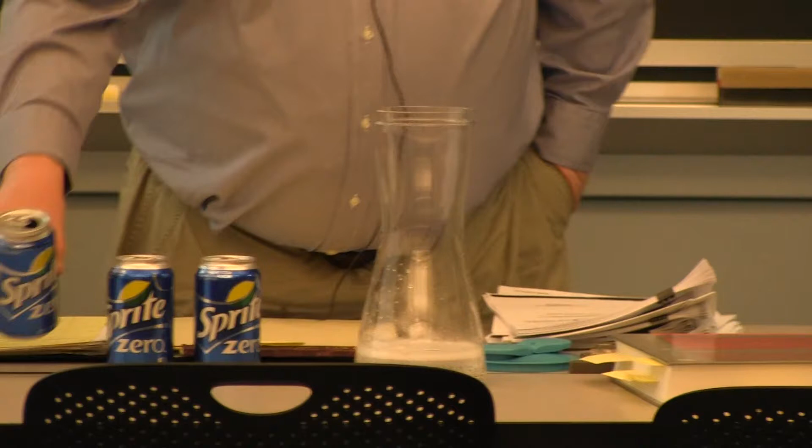Okay, so to start today, I want to take some Sprite Zero. Basically, I could have used club soda, but I wanted something where if I pour it in here, you'll see the CO2 evolve. Okay, suds, foam—they're not really suds, they're foam. I want you to watch how quickly that dissipates, the gas dissipates.

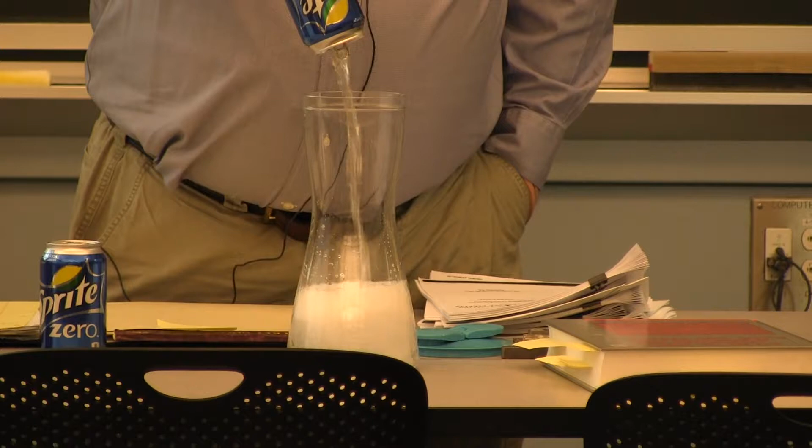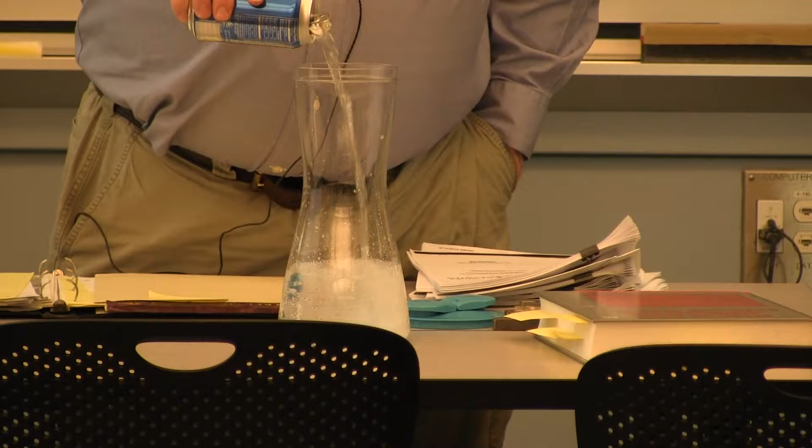We're going to talk about it towards the end of class. This all relates to, by the way, this is sugar-free. I don't want to spill it all over the table and get everything sticky for the next class.

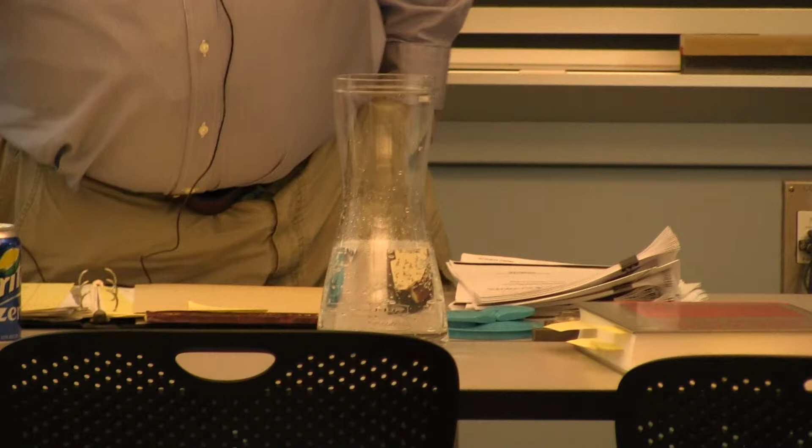This relates to the Achilles heel of steel. I don't know if I ever told you the Achilles heel of steel, those of you who took the class last term—anybody know what it is? It's called hydrogen, okay? And what you just saw, CO2 coming out of a soda, is time-wise an almost perfect analogy for how fast hydrogen comes out of steel as it solidifies over the next 48 hours.

This will be flat and have no zing to its taste in 48 hours. You saw how fast the CO2 came out and bubbled away, and that's about how fast, once the steel starts to solidify, it's rejecting the hydrogen. And it continues—you see some bubbles coming up here, and you'll see them at the end of class, but there'll be fewer.

We'll talk about hydrogen, but in processing of steel, there are specifications that say if you introduce hydrogen from welding or electroplating or any other process, you have to put it in a furnace and bake the hydrogen out within 1 to 4 hours, because if you don't, you could form cracks. The hydrogen can form cracks in the steel under certain conditions. We're going to talk about that more than you ever wanted to know, at the end of today and tomorrow.

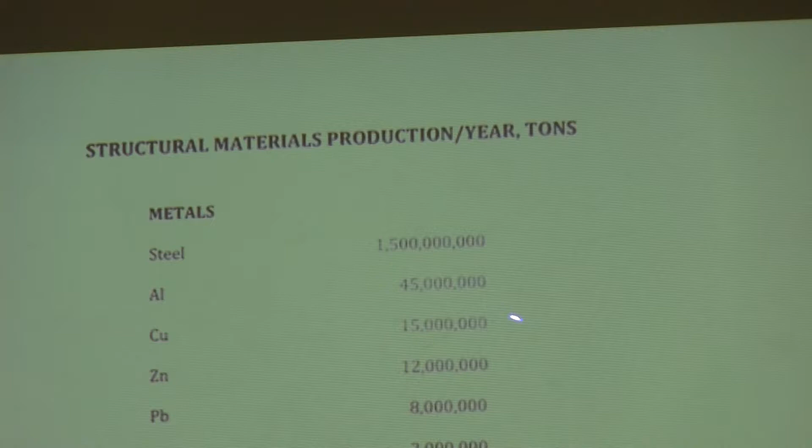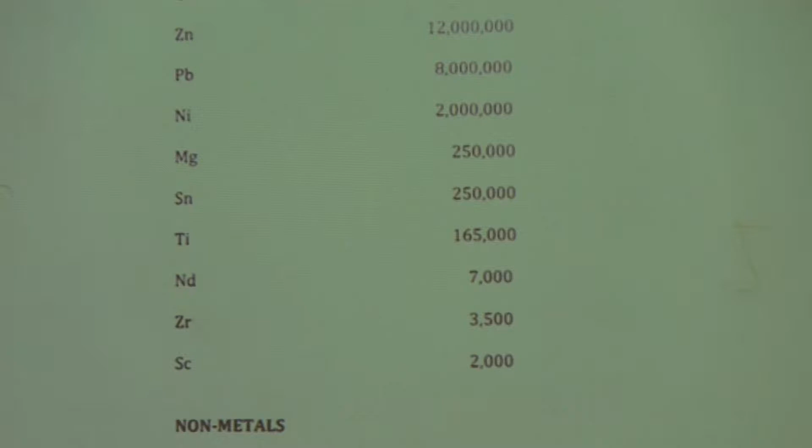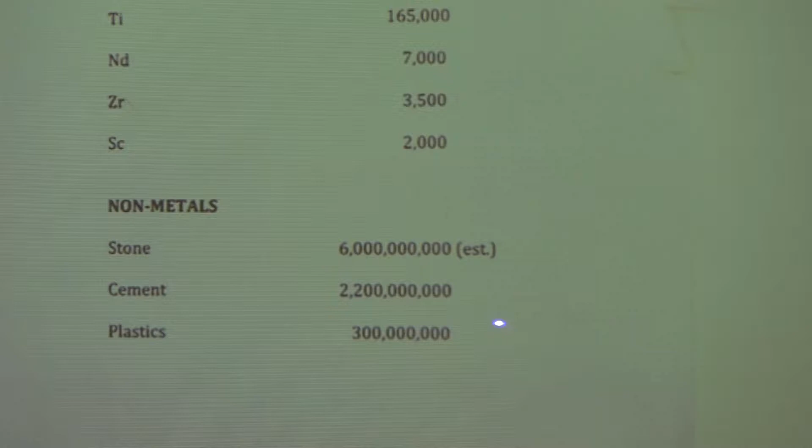If I look at tons produced per year, steel is 1.5 billion tons. The next most common metal is 45 million tons. Stone is the most at an estimated 6 billion tons in the world. Cement as a structural material is about 2.2 billion tons - these two are obviously more than steel. Plastics, all combined, are only 300 million tons, so the plastics industry on a weight basis is 20% of the steel industry.

So yes, we will talk a fair amount about steel because it's an important material. Among structural materials, it's the predominant one. Now you can say, well, what about aluminum in automobiles?

Well, they've been making all-aluminum Audis for 20 years. They made an all-aluminum Duesenberg in the 1930s, or a Pierce Arrow - there's a picture I have of J.P. Morgan standing next to his all-aluminum Pierce Arrow. But those were not consumer cars like a Model T. The Ford Taurus is still made out of steel.

Yeah, you can buy a $90,000 Audi, it's all made out of aluminum. And you're going to soon be able to buy a Ford F-150 - not all aluminum, not the frame rails, they're still steel, but the body is going to be aluminum. They haven't announced the price yet; this summer they'll announce it.

Anybody want to bet what the increase in price is going to be? The base F-150 right now is about a $30,000 truck - you can add bells and whistles to get it up to $55,000, but it's a $30,000 vehicle. Anybody want to guess what the all-aluminum F-150 will cost? I'll bet it's in the $40,000 base price range - it'll add a third to the price. That's my prediction. But it's going to blow away all the other pickup trucks on gas mileage.

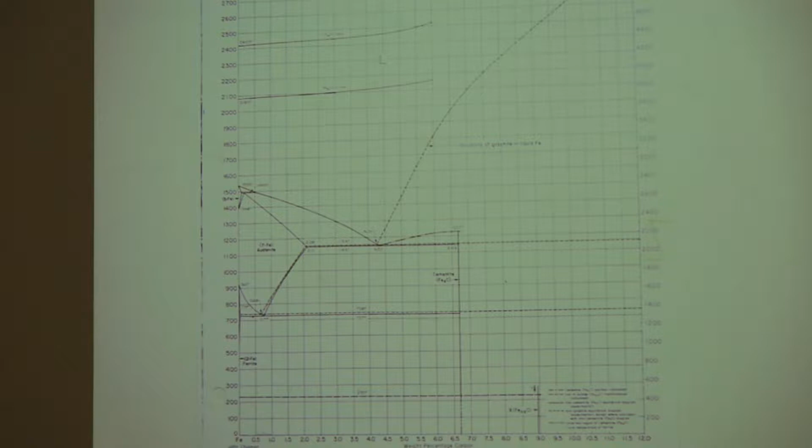Those who've been to our departmental conference room know it's called the John Chipman Room. John Chipman came to MIT in the late 1930s. He was a physical chemist from Georgia Tech, and he taught people how to make steel with consistent composition. He had a tremendous impact on this industry.

This phase diagram was evaluated. He retired in '62. This phase diagram he published in '72, when he was 75 years old. So John and I remember going as young assistant professors to meet with John Chipman and ask him some questions when he was in his 80s. He was still working on things.

But the interesting thing about steel: this is the liquid region at high temperatures, above 1530 degrees C. The steels are at less than 1 or 2% carbon, and they have this region called austenite. The cast irons are also on this diagram—they're above about 2.5% carbon. So the cast irons are here, the steels are over here.

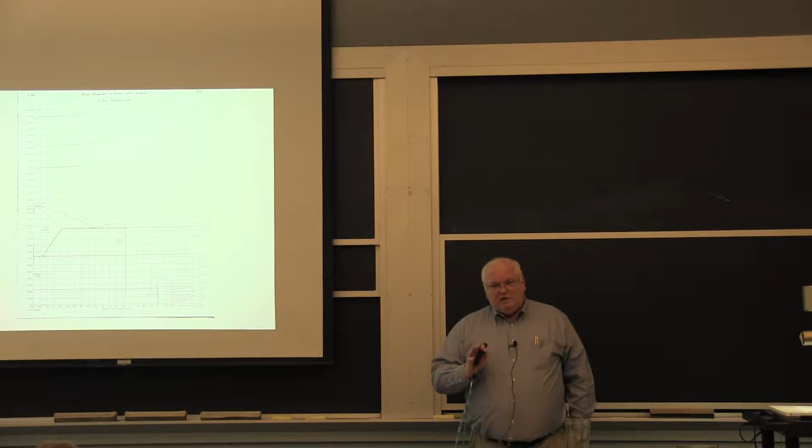The interesting thing about steels, and one of the things that gives them a lot of their weldability, is they transform from body-centered cubic to face-centered cubic at a temperature somewhere between 723 and 910 degrees centigrade, depending on the carbon content. And because of that solid-state transformation, the steels can give you very fine grain size.

Very fine grain size in most metals gives you very good strength. So it turns out I can weld two pieces of steel together and just let them solidify without doing anything special, and I'll get 100% joint efficiency. That's not true in many of your other materials. It is true in steel, and it's true in titanium.

Titanium has a phase transformation like this. A system that gives you a crystal structure phase transformation leading to a natural refinement of grain size will give you very good joint efficiency. You go to aluminum, and you're going to see we have some problems getting 100% joint efficiency.

What's 100% joint efficiency? You weld the bar together, and you pull on it, and you get the same strength as the base metal. We're going to talk about whether you want the same strength, or what happens if you use undermatching filler metal.

So it would always fail in the weld metal. Or do you want overmatching? And how much overmatching? Well, it turns out the answer is you do want overmatching for good mechanical behavior reasons, but we'll get to that as we go along.

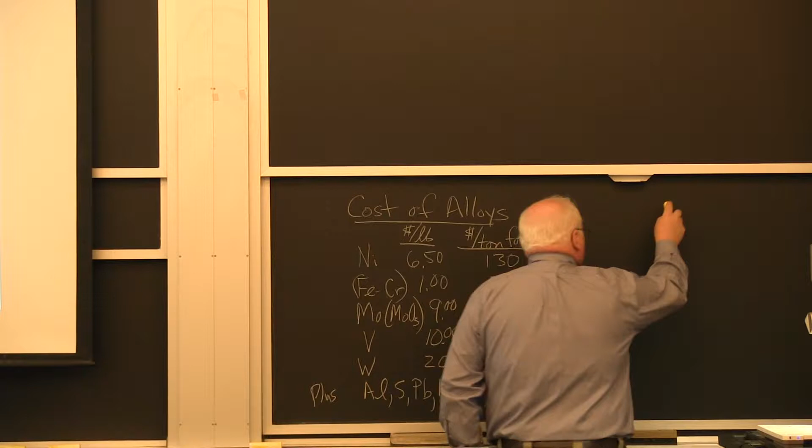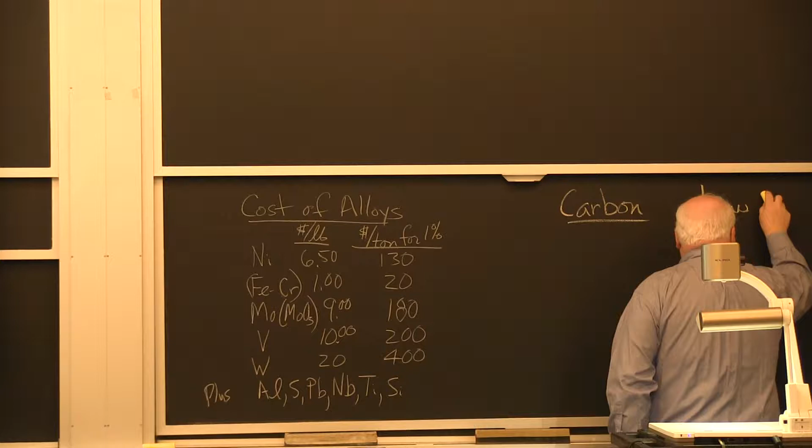But this is the iron-carbon phase diagram. All steels are based on this. In fact, the steel industry, starting probably 100 years ago or more, divided steels into carbon steels and low alloy steels. Or actually, they called them alloy steels, but we really call them low alloy now. They also have high alloy.

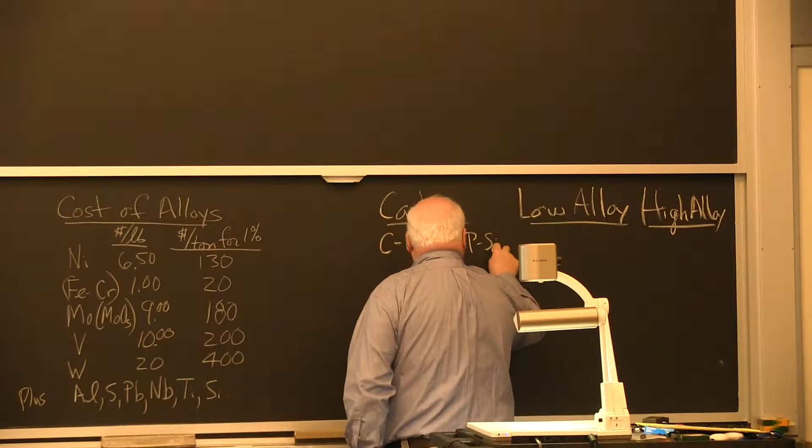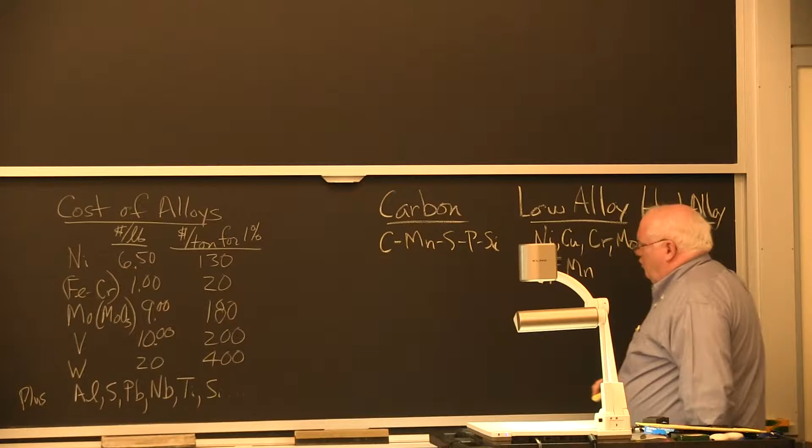Carbon steels contain only carbon, manganese, sulfur, phosphorus, and usually silicon. If they have any of these other things—like nickel, copper, chromium, or molybdenum—or high manganese, which I think is above 1.25% or so, they're called low alloy steels.

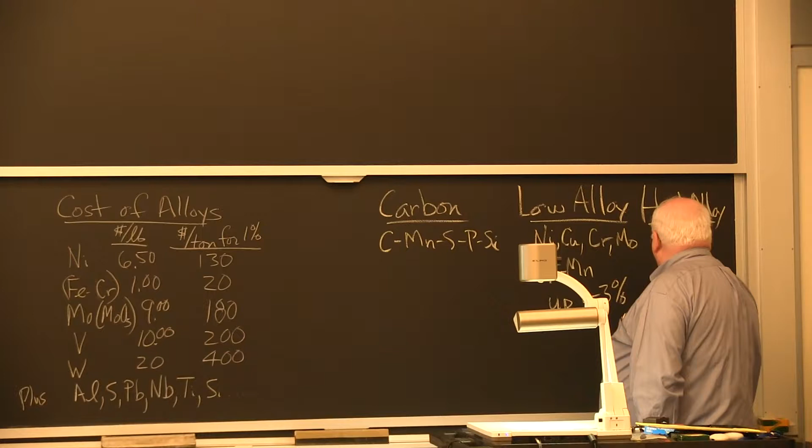The alloy content might be, let's say, up to 2 to 3%. High alloy steels are greater than 4% typically. And if you get high enough alloy, you can get steels that we don't even call steels anymore—when they're less than 50% iron, we start calling them nickel-based alloys or cobalt-based alloys.

There's an entire system, and when Mike Balmforth talks about stainless steels, he'll show you a genealogy of steels similar to what I showed the class last semester.

But in any case, carbon steels historically were dirt cheap. They were priced differently than low alloy steels because it was much more difficult and expensive to make low alloy steels, due to the alloy content. How much cost was there? Well, if I add nickel to steel at a 1% level, I'm adding $130 a ton.

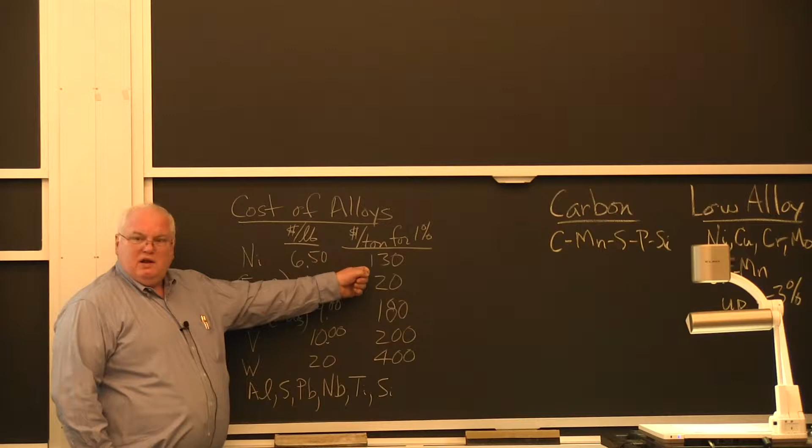What's the typical price right now if I went out to buy some carbon steel plate or bar or something? Anybody know what it costs per ton for a ton of steel? Approximately.

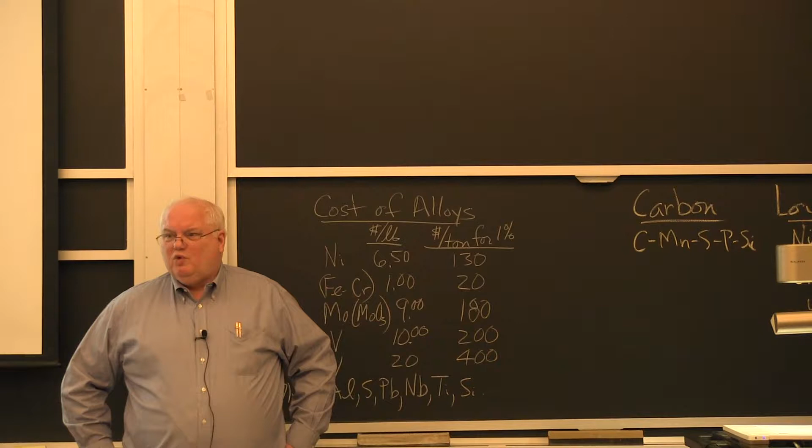That's if you're buying in low quantities, but if I'm General Motors, I'm going to be paying $400 a ton, which is only about 20 cents a pound. So carbon steels right now, the cheapest bar stock is probably $400 a ton.

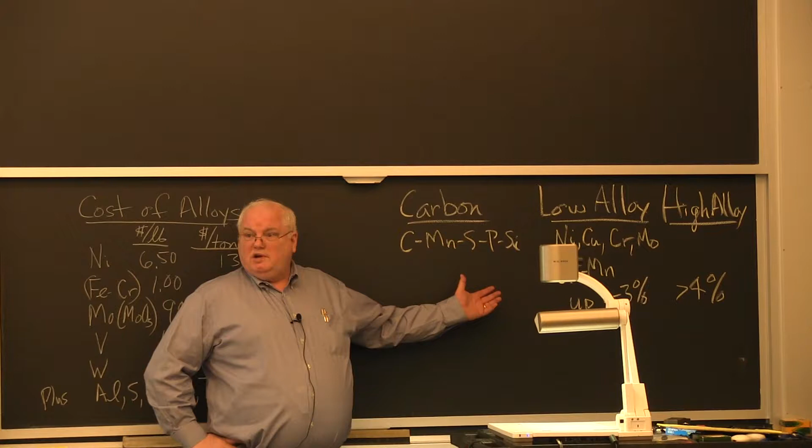Reasonably good quality automotive sheet might be $1,000 a ton, so that's 50 cents a pound. But this is if I'm going to go out and buy 100,000 tons, like General Electric Appliance Park, where they make washing machines and refrigerators, or General Motors. They're going to negotiate prices of $400 to $1,000 a ton. If you're talking low alloy steels, the prices can be anywhere from $800 a ton all the way up to $10,000 a ton or more.

And if I'm talking high alloys, now you're in your $4 a pound range per ton, $16,000, or $8,000 is $4 a pound. But if you get to the nickel-based alloys, the high nickel alloys, you could be paying $30,000 or $40,000 a ton. So we build nuclear reactors out of these things, out of great big thick plate, but it's not cheap.

Nuclear reactors cost - right now, what's the cost of building a nuclear reactor? Well, you can't do it because the environmentalists will take you to court for 10 years. But if you could build a nuclear reactor, what would one cost? You're a nuclear physicist - 4 billion. Yeah, 10 billion is a good number. 4 billion, I'm not sure. You're going to have a very friendly country, okay? To build, you could build one for 4 billion.

Yeah, and it takes about 10 to 15 years to get certification, which is one of the reasons the cost keeps jumping. But it turns out they use high alloys, the best alloys. But again, this gets into a matter of cost. If you're going to make an automobile, you're going to make it out of carbon steel if you can, or you're going to use a very low alloy steel, so far as that goes.

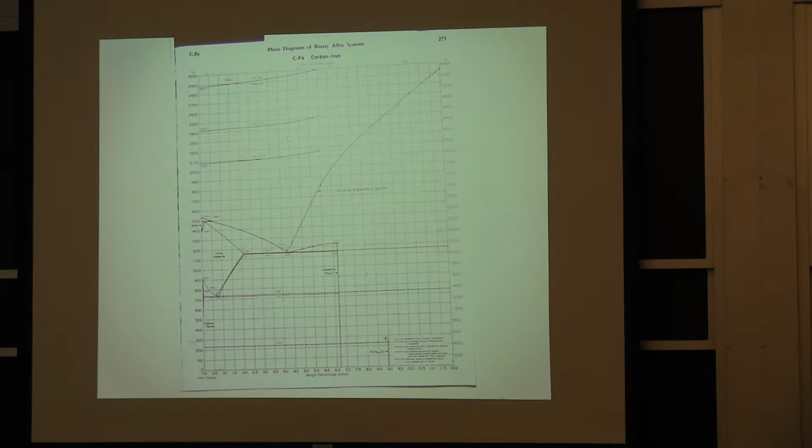That's because the steel can transform at high temperatures to this face-centered cubic austenite phase, and if you quench it, you can get a metastable phase, which is not this body-centered cubic ferrite, but you can get something called martensite. And martensite's as hard as a file, a steel file, so far as that goes. So you like to have something that can be hardened.

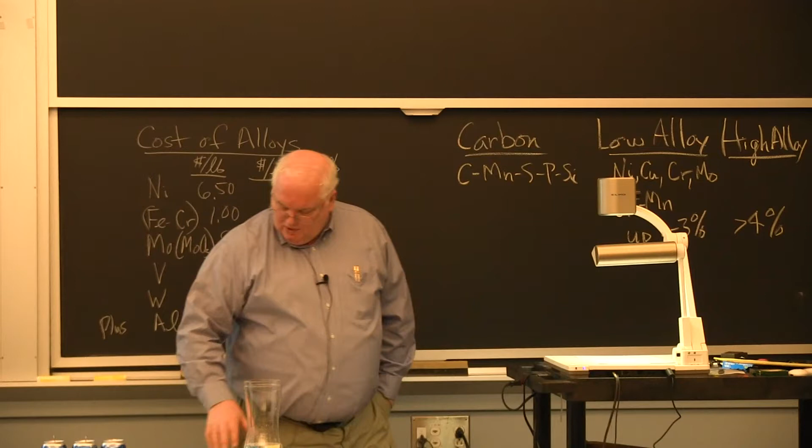There are other alloy systems that can be hardened. Aluminum is precipitation hardened - you heat it up and you cool it down, or you quench it. You heat it up, solutionize everything, quench it, and then you bring it up to an intermediate temperature. We call it aging, and you get little precipitates. And some people will tell you that's nanotechnology. Well, the Wright brothers used nanotechnology in their engine at Kitty Hawk. It was an aluminum copper alloy that had been precipitation hardened.

Aluminum for lightweight, because it's an aircraft. Precipitation hardening, so it had decent wear resistance. And it's still sitting in the Smithsonian today.

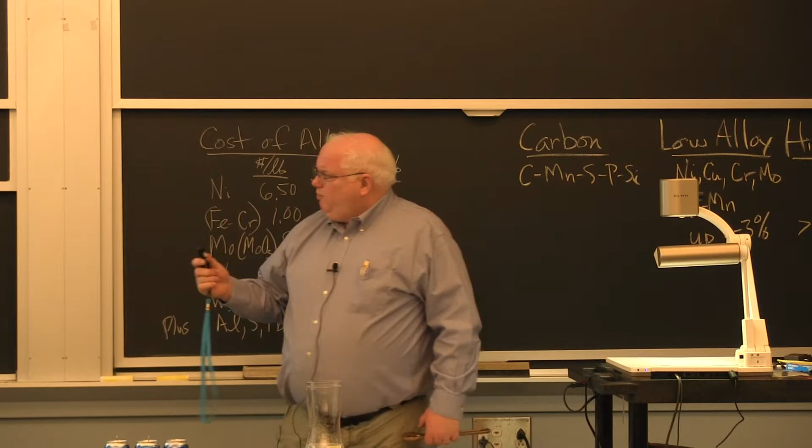Cast iron is more than 2 or 2.5% carbon, more than carbon steel, because cast iron is a eutectic. If I look at the melting point here, cast iron, you'd like to have something that is low melting to make it easy to cast.

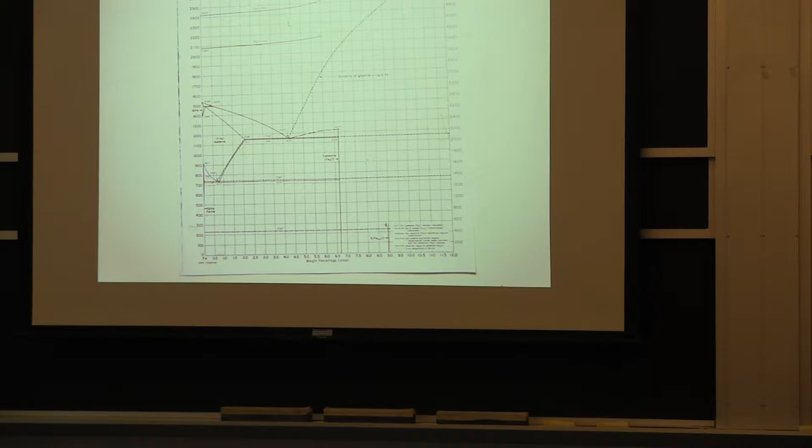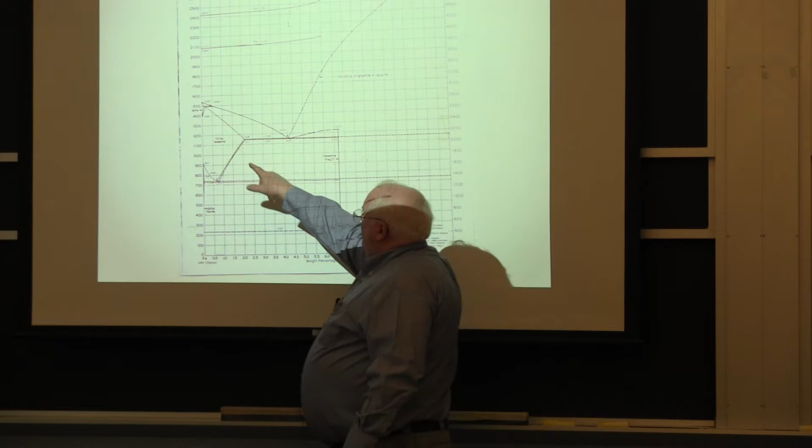Historically they call it cast iron because if you took iron ore, where you didn't necessarily want carbon, you would mix iron ore with coal, or originally, at Saugus Iron Works, they mixed it with charcoal, which is carbon, just a wood source of carbon. And when you try to melt it, the carbon will alloy with the iron and form cast iron.

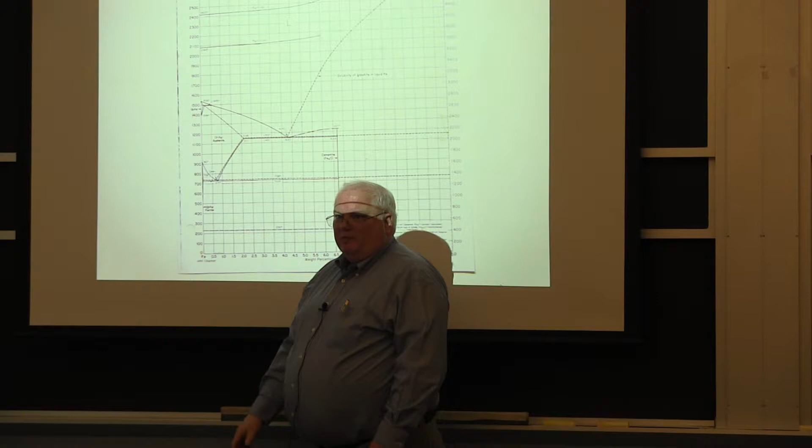In the 1600s, they didn't have the phase diagram, but it was cast iron that melted at a low temperature. They could take that cast iron and beat it, forge it, heat it up. That's the blacksmith, folding it over, making swords and stuff. As he did that, the carbon would burn off the surface. If he did it enough, he'd get something more malleable, more ductile, that was wrought iron rather than cast iron, because he had wrought it on the forge. And if he did it long enough and didn't oxidize it all the way to nothing, he would end up with steel.

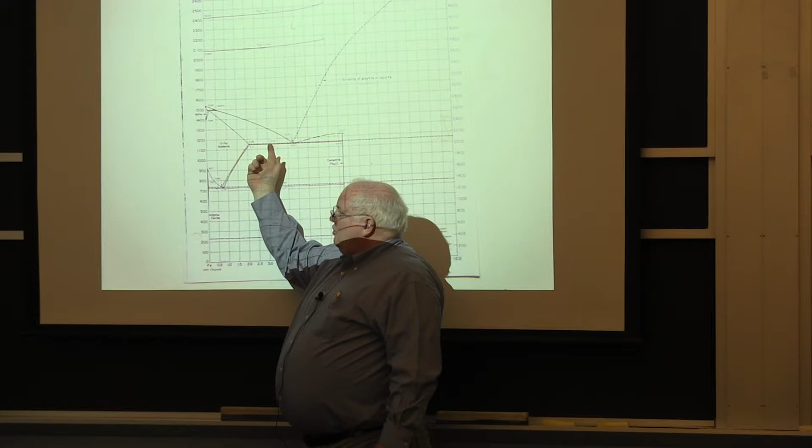So historically, they would take iron ore, reduce it with carbon, and end up with cast iron. Then they would sort of work their way back across the diagram, and if they're lucky, they could end up with little bits of steel, which were tremendously expensive. All that work that went into things.

I've estimated the person hours per ton in the 1600s was about 2,000, maybe 3,000 person hours per ton of cast iron or wrought iron. Well today it's about 20 minutes a ton. Look at that productivity gain.

And what was the big productivity gain? It was 1856. Sir Henry Bessemer taught us how to build a vessel so we could burn the carbon out of the cast iron more efficiently without oxidizing all the iron back to the ore. That was the beginning of the Steel Age in 1856.

And who was the Bill Gates of his day, the richest man in the world? Carnegie, Andrew Carnegie. In his day, he was richer than Bill Gates or Warren Buffett, on a proportional scale. And it was all because of the railroads and steel.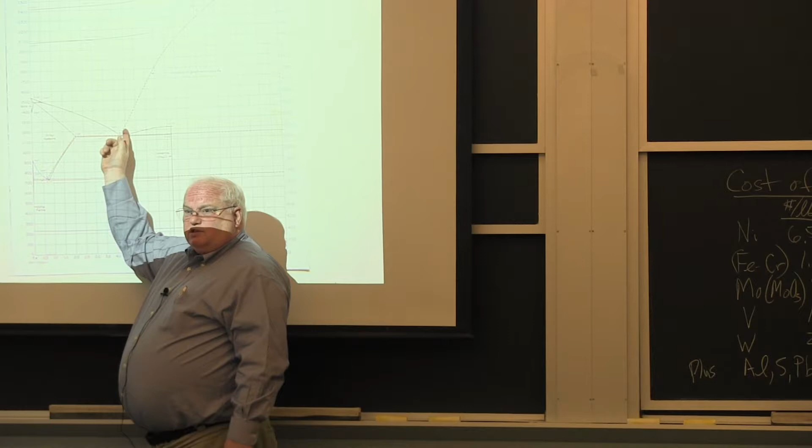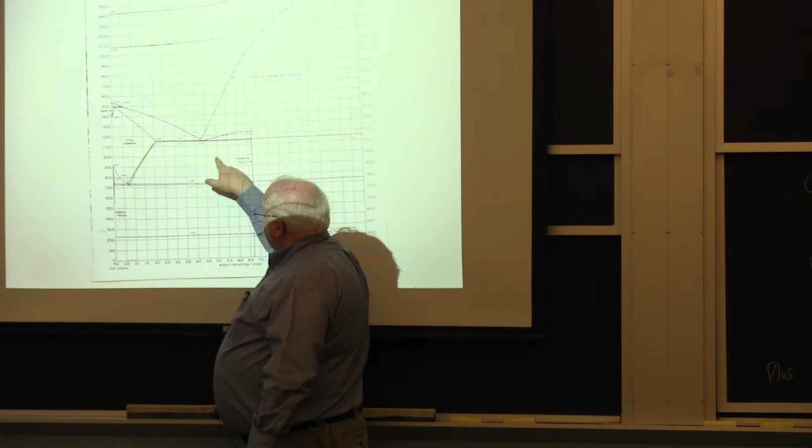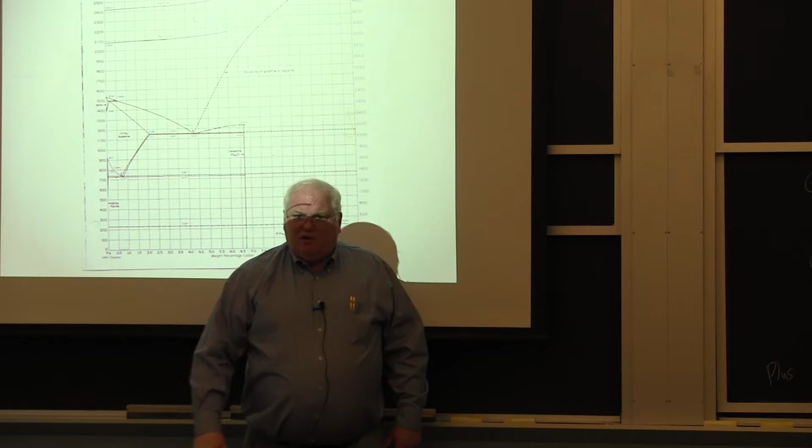So there are certain things that came along, but the reason it's called cast iron is because that's how it was made originally. You take charcoal and iron ore, reduce it, and you end up with cast iron, which is right here on the diagram. All the cast irons are somewhere around 4.3 percent or so, but you can have cast irons down here or up here. You don't go above 5 or 6% carbon in cast iron because you run into other problems.

To tell you how it happened: in the United States we had some iron ores that were very low in phosphorus, so we could make good steel. In Czechoslovakia, a lot of the Europeans, the Czechoslovakians, were some of the best steel makers in Europe. And the Czechoslovakian iron ore had a lot of phosphorus and a lot of sulfur, and they tried to make their steel but could not get consistent results.

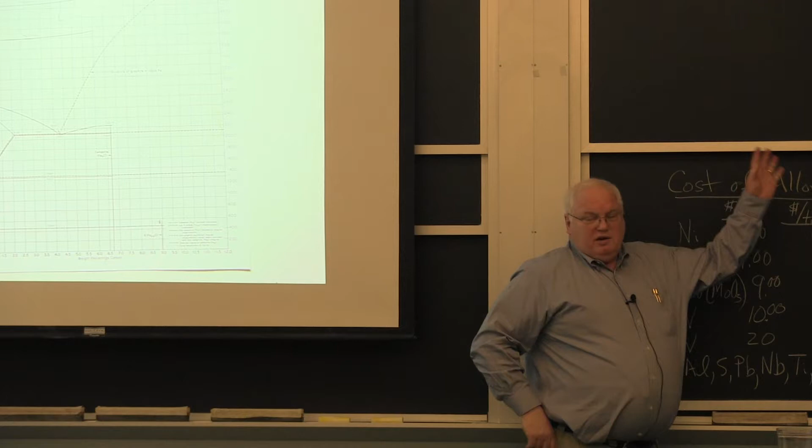It wasn't until John Chipman came along in the 1940s that really taught people how to get consistent results. But you don't just take iron and carbon and put them together. You put them together with a flux, and that flux might be limestone. It could be calcium silicate, which geologists call wollastonite, just a rock. They might throw sand in there. So they throw these different things into the cast iron, which you're then going to turn and burn the carbon off to make steel.

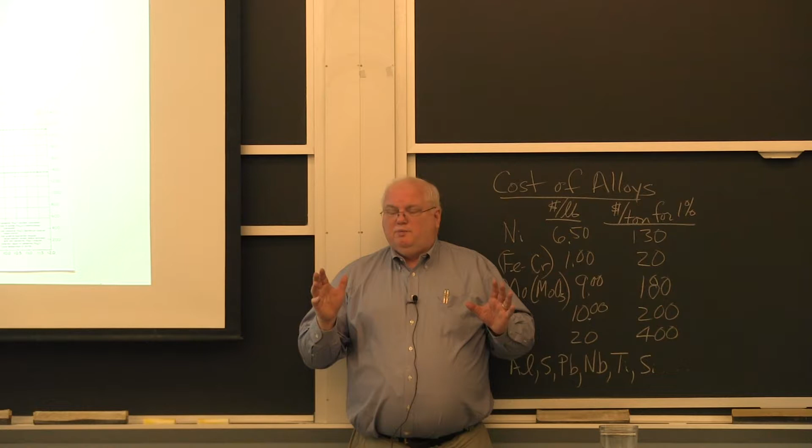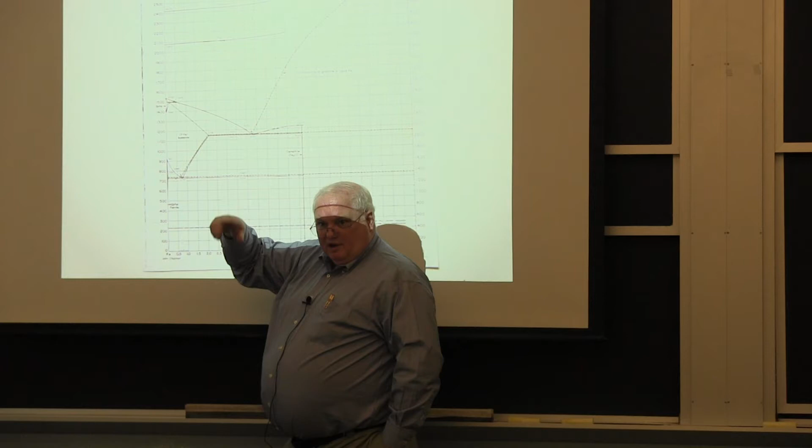But if you have very much silicon or very much sulfur, you've got a real problem, because the iron-sulfur diagram has a really deep eutectic with the sulfur. Remember, sulfur is right underneath oxygen on the periodic table. Here's your eutectic with carbon, but the eutectic with sulfur is an even deeper eutectic, below the hot working temperature where you're going to forge that steel.

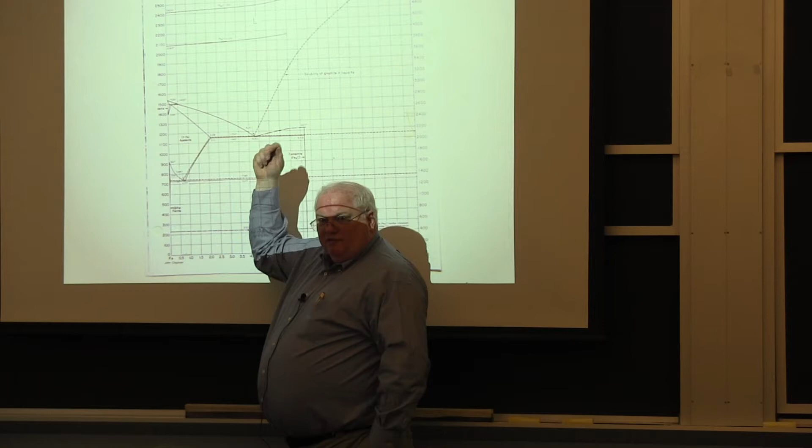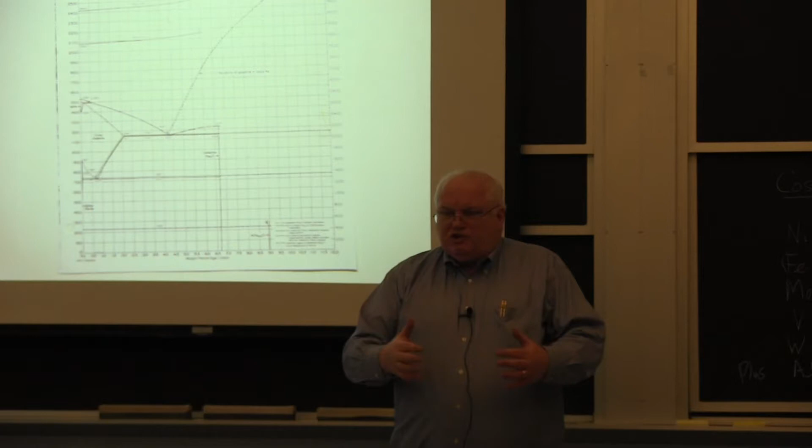So you'd form liquid iron sulfides on the grain boundaries, and they call it hot shortness or hot tearing. When you try to roll or forge the steel, it just crumples into pieces because of the liquid iron sulfide. Someone learned if you throw some manganese in, it will form stable manganese sulfides that melt above the melting point of steel. So manganese is merely a way to tie up the sulfur impurity that comes from your coal.

Then they had problems with phosphorus, and they had to learn to use what they call basic refractories, like calcium-containing refractories. There's acidic, which is - and I hate these terms, but people were chemists back then, and they knew acids and bases. The silica-based slags were considered acid, and the basic slags were based on calcium or magnesium, like calcium hydroxide, magnesium hydroxide. Silica would tend to form acidic mixtures with things.

They make no sense to me today, but they made sense to the people who were basically working with chemists who were working with water-based systems back then when they thought about these things.

I went back to a 50-year-old book on welding metallurgy, written in the mid-60s, and he didn't even list the basic oxygen process, which is how all steel is made today, because it didn't come into being until like the 1970s. But even back then, if you read specifications, it said it can be made by the acid process or the basic process. That's just a question of - you've got iron and carbon, and what is your other constituent? Your slag is going to be made out of wollastonite or sand, or it's actually made out of a bunch of these things. But what's the composition of it?

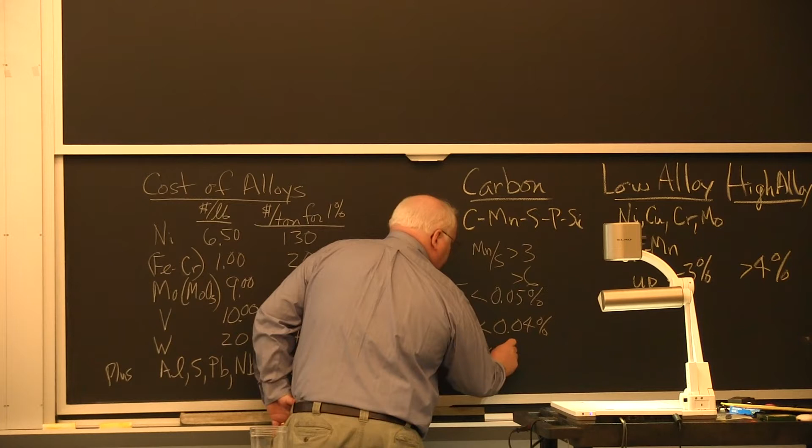If I go look at an ASTM spec that was originally written in the 1920s or 1930s, it will say the sulfur must be less than 0.05%. So that's, let's say, 1920s. By the 1940s, they were saying sulfur must be less than 0.04%. By 1975, when Tom Eagar was working for a steel company, sulfur was typically less than 0.01%, and the Japanese were making it at 0.005%.

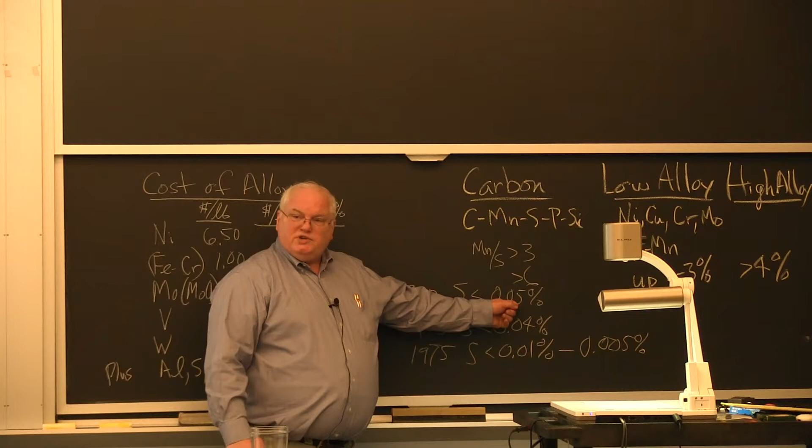They had modern equipment, and they were beating our socks off in quality of steel. So you want to have the sulfur very low in almost every case. 0.05%, 500 parts per million, was about the best they could do in the 1920s with any regularity.

They didn't know how to control it until John Chipman told them what types of slags and stuff to use. By the 1940s, you'll see 0.04. I can go to an ASTM spec and I can look at it, and they'll still have today, say the sulfur has to be less than 0.05. Are you kidding me? No one makes a 0.05 steel anymore. They haven't made it since before 1950.

They got to this, and then they were getting to very low sulfur. Sulfur does a lot of bad things for toughness and other things in the steel, but we've learned how to make it better and better. We can regularly get down to 0.002 or 0.001 sulfur today if we want, but we don't usually need to.

I just think it'd be nice to talk a little bit more about the slag, because you mentioned it a few times, and I know it's an ionic phase. Right, lower densities, it's on top, it's at very high temperatures, so you're close to equilibrium, but I'm not sure everyone here follows that. Yeah, okay.

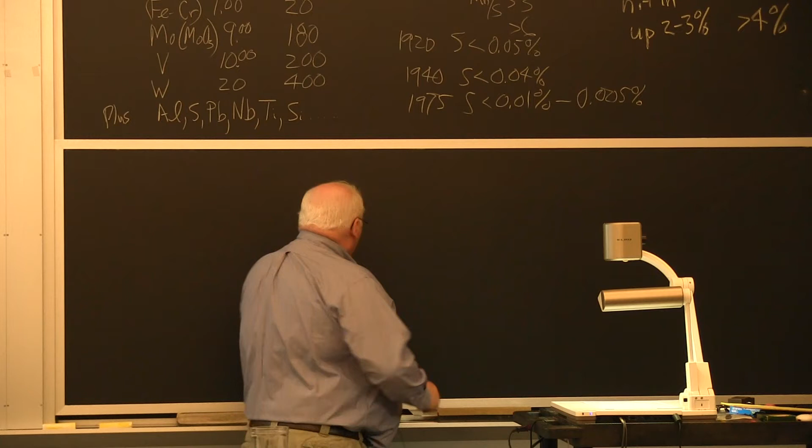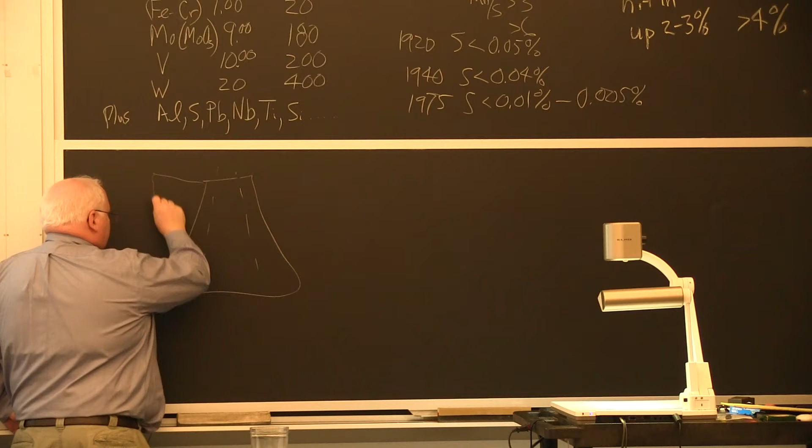So if you go up to Saugus Iron Works, they've got this big shaft furnace, and it actually is on a hill. So this is the grade of the hill, and this is about 15 feet above the bottom down here.

They would pour in charcoal, iron ore, mostly that's probably Fe2O3. They basically got it out of the bogs here on the seacoast. They'd go out there and add sand or limestone.

Limestone is calcium carbonate, if you will. It could be magnesium carbonate. This is basically silica. It could have some manganese oxide. It could have some titanium dioxide. It could have lots of things in it, in the sand, depending on what you got.

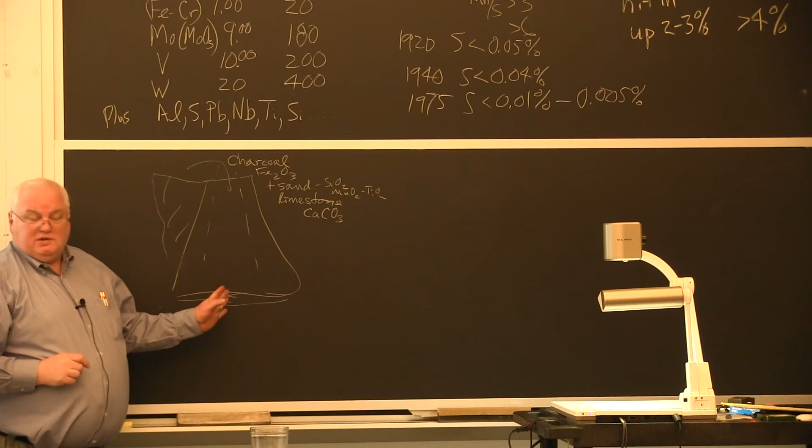You throw these things in the top, and this shaft furnace, they used to call them, they still call them the blast furnaces, and they blow the air in here. They have great big bellows down here, and a water wheel that's pumping this bellows and blowing air in here, and you're burning up the carbon, the charcoal, generating heat. It's really hot down here.

It's cool here because you're dropping the stuff in, and the particles—you have a particle bed reactor here. You're sending carbon monoxide up the stack, and down here you'll generate, on a hearth of sand, some cast iron.

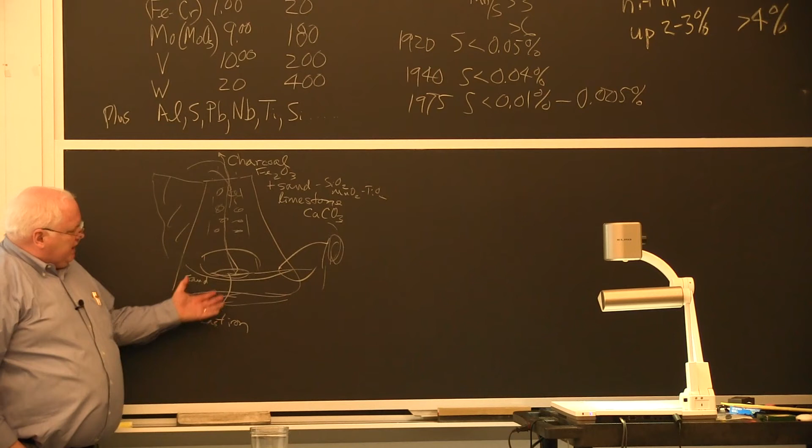Now, this cast iron will also have a slag on top that forms, and it's basically a molten glass—a calcium silicate molten glass. If you pour it out on the ground, you can hit it with a hammer after it cools off and it shatters like glass. In fact, you can find obsidian, which is a natural glass formed from volcanoes. It's basically, you just melted a bunch of sand, and this becomes the slag.

And the slag is where you want your impurities to go. Some of the sulfur will go up the stack, some of the phosphorus will go up the stack, but a lot of it gets trapped in this molten glass. So now it's a calcium silicon phosphoric acid glass, or it's got sulfates in there. It's just a complex liquid ceramic mess.

People in this part of the country could make really good steel because they had really good raw materials—they didn't even know what made them good. People in Czechoslovakia had to deal with all this high phosphorus ore, and they were beating their head against the wall until someone figured out, let's throw some manganese ore in here. They got better results, and it didn't crack when they started to forge it.

Is that kind of what you wanted? Yeah, okay, to help them understand some of that.

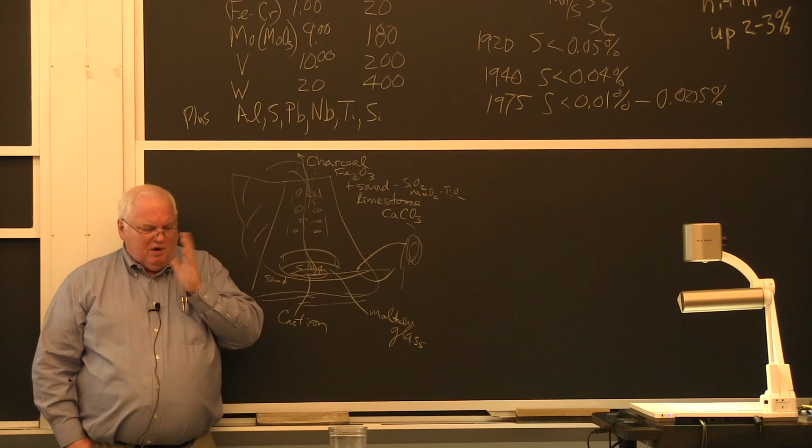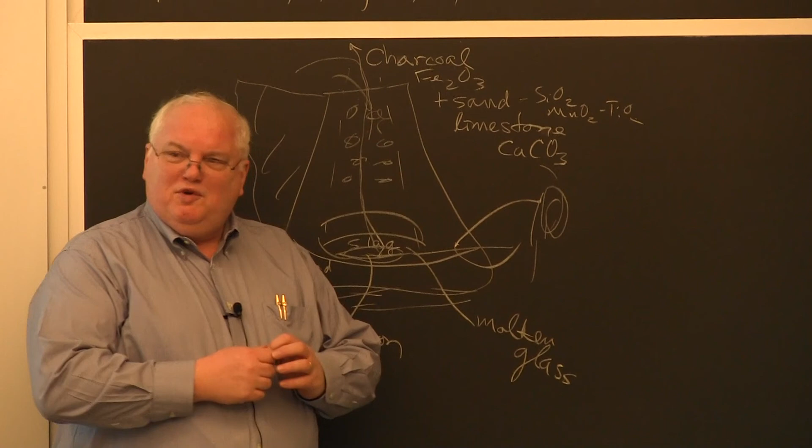So I don't want to go too far on all of that, but I do want to tell the story of—you've heard of pig iron? Does anyone know how the term pig iron came to be?

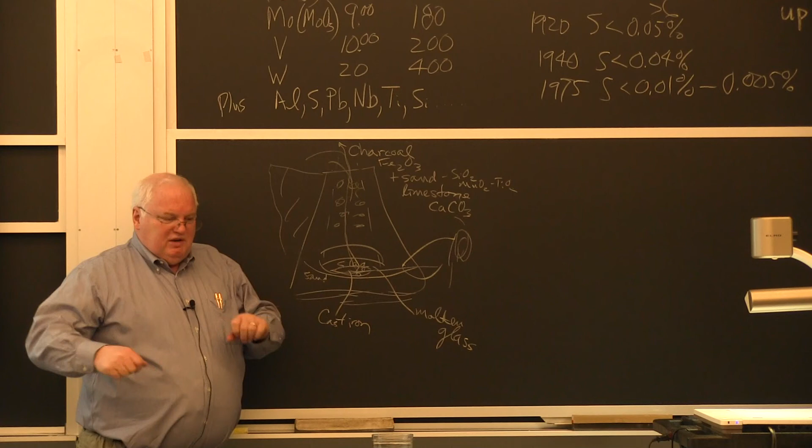So every now and then, about once a day, you would tap the bottom of the furnace. You would have a little clay plug that you put in around the sand hearth, and you would go in there with some steel rods and poke away that clay plug, allowing the liquid metal to flow out of the furnace.

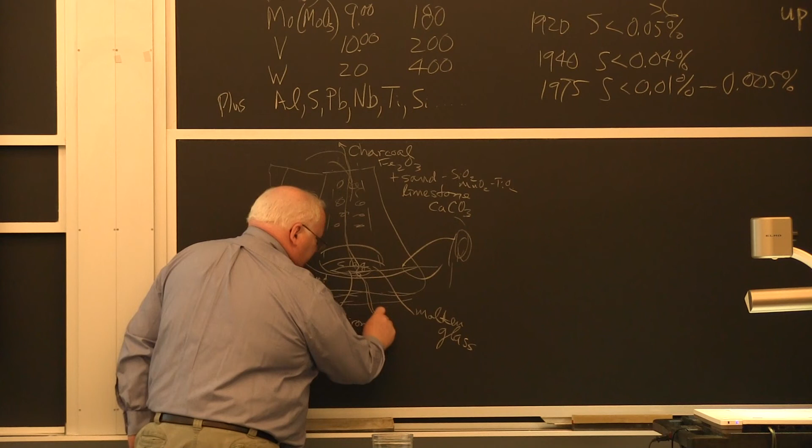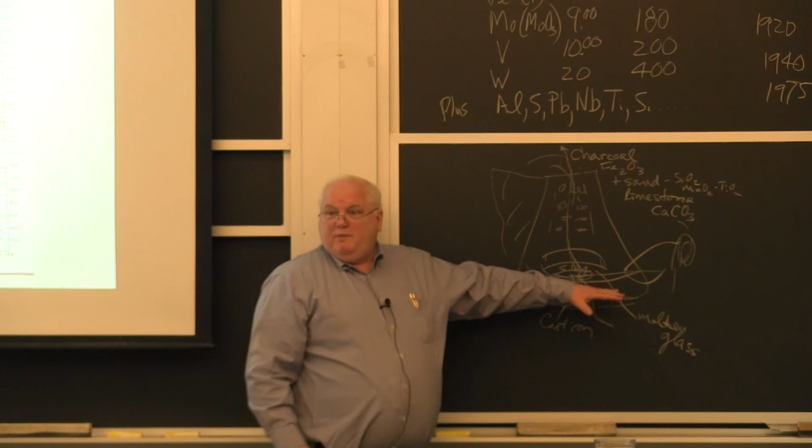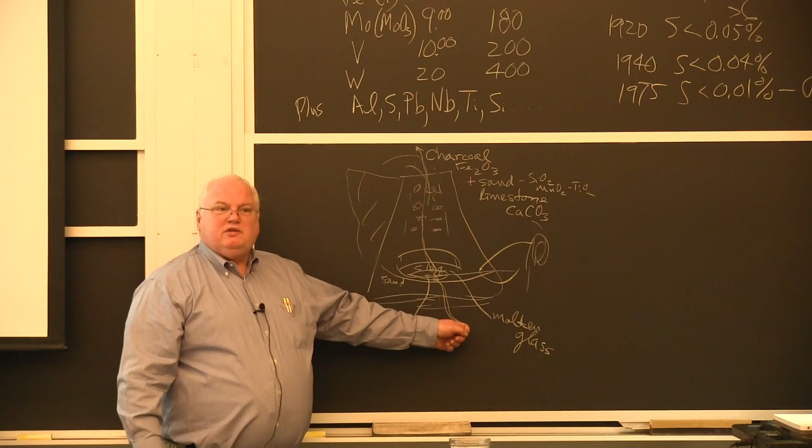If you go up to Saugus, you see the floor around the caster was basically just about 2 feet of sand. They would dig a little trough in the sandy floor for the liquid metal to flow out through, and it would then flow into what you'd call a manifold.

Off the manifold, they would have little castings like this, so the metal would come and solidify on the sand floor. They've dug this stuff in the sand—it's like people at the beach playing in the sand, right? And these were the pigs.

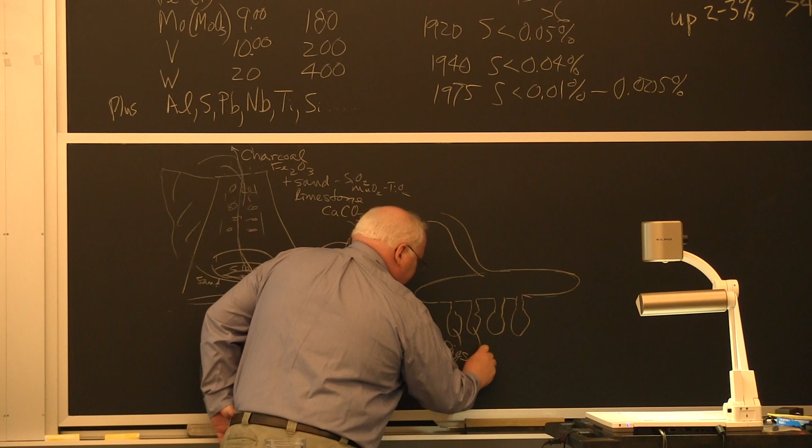And it's called pig iron. They would make little castings—it might be a 40, 50-pound casting like this piece of pig iron. And this bar, anybody know what this bar was called?

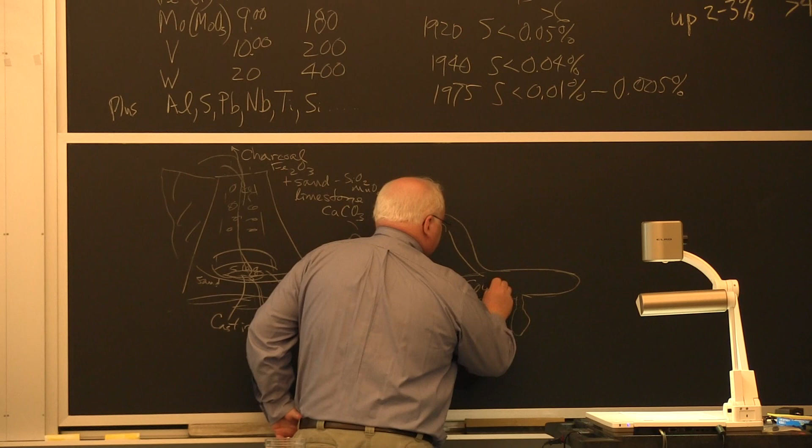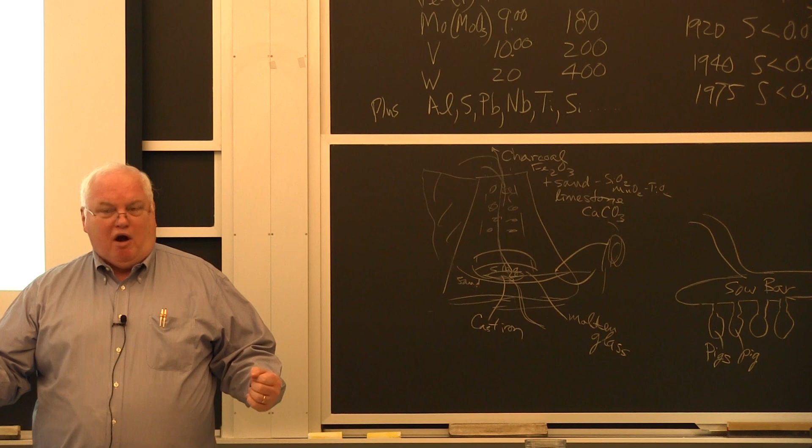It's called the sow bar. What's a sow? A mother pig—those are the piglets nursing off of the sow bar. The sow bar might weigh 400 or 500 pounds. If I'm going to make a cannon, I use the sow bar to forge the cannon from, and I got to have...